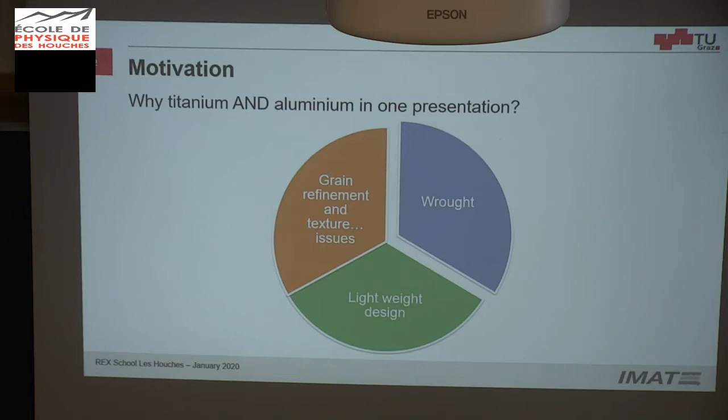And this is the topic we are going to deal with today: we have grain refinement and texture issues, which means basically they don't dynamically recrystallize in the sense of discontinuous dynamic recrystallization, and therefore we don't have fine grains with random crystallographic orientations in the final products. These issues also have some consequences in the applications as well.

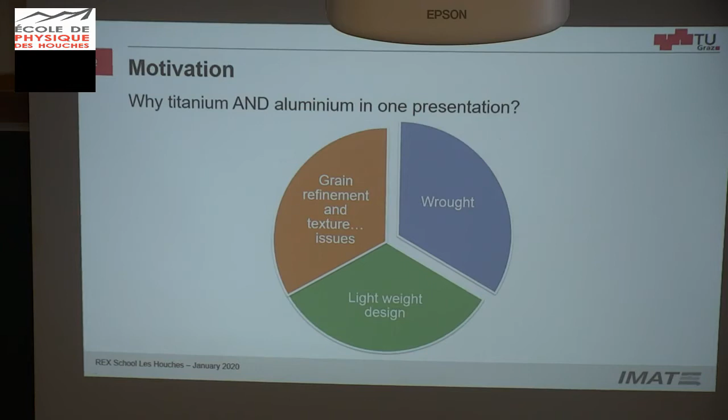So I'm going to give a very, very short introduction on titanium and aluminium alloys because the audience is very wide, and I hope I'm not going to bore you. Then a very short introduction on the meaning of high stacking fault energy materials, and then I will go to the topic, which are the experiments and modeling.

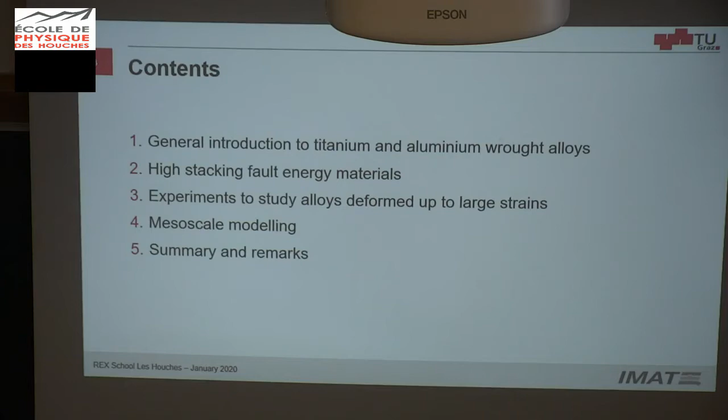So my background is experimental. I did experimental work for many years, and then I moved a bit into modeling, and now I cannot imagine any experiment without a model. And the other way around, I cannot imagine any model without experimental validation or explanations. So it's a bit of a big mix of everything I did.

So titanium alloys are used mainly for, as I said, transport lightweight design, also moderate high temperatures, but it's also used, as you have probably seen, in the Guggenheim in Bilbao. So it's covered by plates made of titanium alloys, because of the high corrosion resistance.

So the most important thing in titanium alloys is that it's very similar to steels. If you know something about steels, then titanium is easy peasy. It's even easier because we don't have any eutectoid reaction, but we have this allotropic transformation. We have HCP at low temperatures, which is not close packed, meaning it's a bit longer in one axis, so we have a crystallographic structure that is not that bad for deformation.

It also has some other slip systems that activate. And by increasing the temperature, we transform into BCC. By adding some alloying elements, we can stabilize the high temperature phase, and we can decrease the transformation temperature of this beta transus. Most titanium alloys have this type of configuration, with temperature and beta stabilizing elements. You also have alpha stabilizing elements like aluminium, which would move the whole diagram upwards. Then you have a mixture, a dual microstructure of alpha and beta.

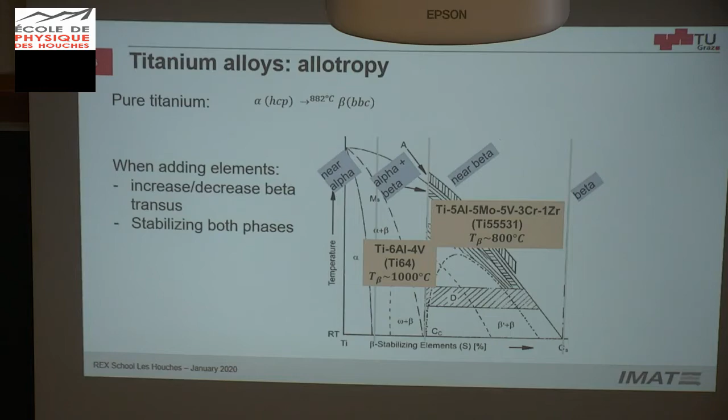So a very complex situation for deformation. These materials are processed either in beta or in alpha-beta, and this makes everything very complex when we want to understand it, control it, and then model it.

Okay, so aluminium alloys, most of you know it, it's almost everywhere. So that's why I put it here. Very day-to-day examples. And this is one of my favorite products, to be honest. Not the fish, but the aluminium foil, because it requires a lot of steps, of rolling steps.

So warm rolling, hot rolling, warm rolling, and then at the end you cannot heat it up again, take it from the furnace and roll again, because the heat transfer is very fast. Then you end up with cold rolling, and in between a lot of steps for recrystallization and also for precipitation. So it has a lot of complexities. During these steps, you may have dynamic recovery during the deformation. If you do extrusion, you may have very large strains, and in the interpasses you have static recrystallization. So you end up with a microstructure which is very weird.

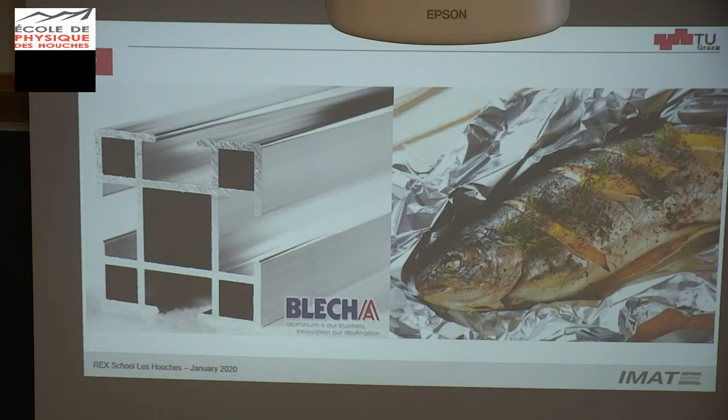And of course, I'm showing here profiles that I think everybody knows. All of them are made of aluminium here, I think. Oh yeah, okay good, this is also very clever. Good, so this is very general, so at least you know what I'm going to speak about.

What they have in common is that they are high stacking fault energy materials. What does this mean? If we have a perfect dislocation, this perfect dislocation can dissociate into two partial dislocations. And this configuration does not allow dislocations to move.

So it's very difficult for a dislocation to go through stacking faults. And secondly, you lose the dislocations that move into two partial dislocations that are not moving anymore. The larger this distance is, the more stable the stacking fault is, and the lower the energy you have for forming stacking faults.

So it's a simplified interpretation of stacking faults and stacking fault energies. Basically, if the stacking fault energy is very high, meaning this distance is very small, the partial dislocations can reconfigure into a perfect dislocation, and dislocations can move as before without problems. Moving of dislocations is what you need for annihilation of dislocations, and having mobile dislocations is what you need for dynamic recovery.

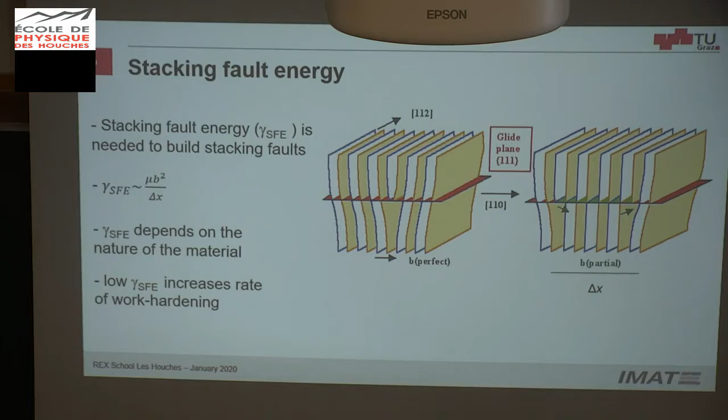And the same happens with titanium alloys. Most of them, if you don't add a lot of alloying elements, behave this way. I don't know what happens with high entropy alloys—maybe you will know something in the future. But most materials are high stacking fault energy materials, which means they will go in this direction.

So this is when we start the deformation: with cold deformation, the density of dislocations increases—this is not what I'm covering in this talk. With warm deformation, at the beginning the density of dislocations increases up to a small strain. Then we may have either dynamic recrystallization or discontinuous dynamic recrystallization, like in nickel-based alloys, and dynamic recovery in our case.

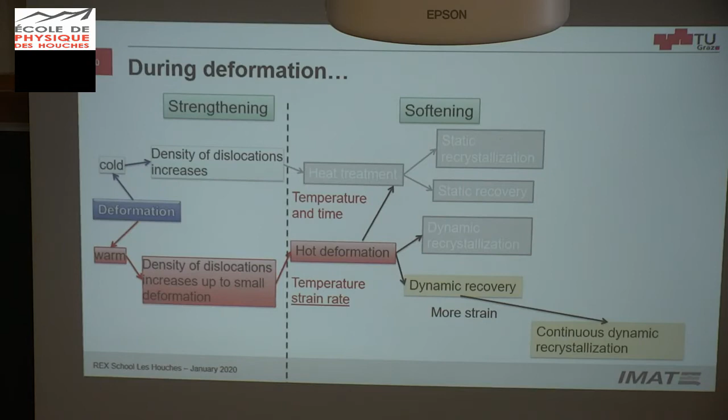And if we go further with the strain, then we will have what is called continuous dynamic recrystallization, or extended recovery, or many of the names you can find in the literature. Basically, we are speaking about materials that during cold deformation form cells, so they don't form stacking faults, they don't form twins.

These cells look like this: we have dislocations at the cell walls and spare dislocations within the cells. During high temperature deformation, the cell walls get sharpened, and then you have subgrain formation instead of cells.

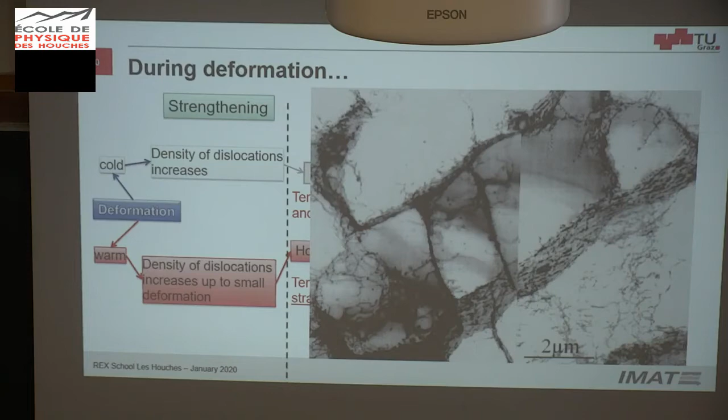Good, oops, sorry, come back. Oh, okay, sorry, this isn't supposed to be like this.

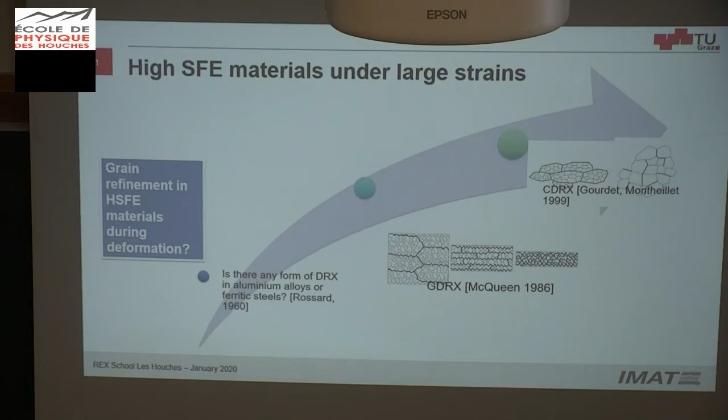So the question of how to refine the grain in high stacking fault energy materials is not new. It was done, I have to calculate, about 60 years ago, the first time at least in the literature, by Rossard. He was asking: is there any form of dynamic recrystallization in aluminum alloys or ferritic steels? By the way, ferritic steels are also high stacking fault energy materials, so you can imagine the same as what I'm saying now, but for steels.

Why am I not showing steels here? Because I basically don't work on steels, but you can imagine the same applies for ferritic steels.

In 1986, McQueen came with the idea that there is some type of recrystallization when these high-angle grain boundaries get flattened by the compression, for instance, and get pinched off by the formation of subgrains. With this, you have what is called geometric dynamic recrystallization, which means you need huge deformation to get very thin, plate-like grains, through formation of subgrains due to dynamic recovery, and then pinching off of the high-angle grain boundaries under deformation.

Later on, Montheillet and Gourdet were working on what is now called continuous dynamic recrystallization. This was, I'm pretty sure you already know, a kind of scientific fight between these two different theories. We think it's not either this alone or that alone, but most of the time a combination of them.

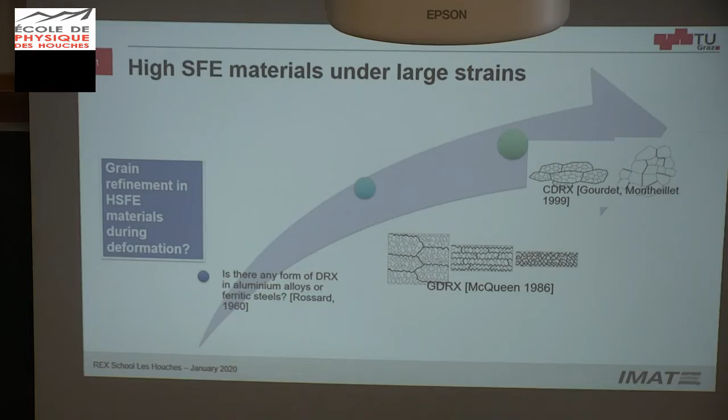The group of McQueen also split, and they went on with geometric dynamic recrystallization, calling it extended dynamic recovery—the name is more or less the same. Here the idea is that subgrains are formed and allowed to rotate. The dislocation increment goes into the low angle grain boundaries, so the misorientation between subgrains increases until you have the formation of high angle grain boundaries. So it's a very simplified interpretation of both.

When we want to study deformation at large strains, we think about experiments and models. The models are, in my opinion, not meant to replace experiments. I think yesterday in the Digimu workshop the same idea was given—it's not to replace experiments. We think of models as a way of explaining the phenomena, as well as to reduce the amount of experiments or direct experiments in one direction, but not to completely get rid of experiments. We need experiments to explain and validate, so both of them. Otherwise, we don't know what we are modeling.

And this was one of the largest problems with respect to continuous dynamic recrystallization and titanium alloys. I'm going to show this afterwards.

So in the experiments, for deformation at large strains, we want to get the flow curves—stress strain—and the samples for further investigation.

So this, you're laughing, but this is not always understood. What did you do with the samples? I threw them away, I don't know the name. I changed them, I mixed them.

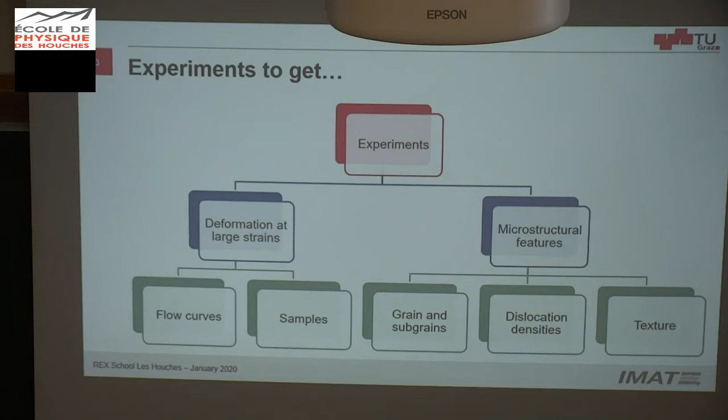Which experiments? For deformation at large strains, you don't have many experiments. You have hot torsion—this is a typical experiment, not a new one. You may have something in industry, similar to hot extrusion. There are also ways of getting large strains in small steps: you get a strain, then static phenomena, then strain again, then static phenomena again. So you have a cumulative large strain, but not continuously.

For microstructural features, you may use direct methods—you open the material and take a look at it. This is microscopy, any type of microscopy, mainly for dynamic recovery. We use a lot of EBSD.

Then you have other, indirect methods, which are not much used. I know Andras is working a lot on XRD, but you may also use differential scanning calorimetry to account for stored energy, for example, or hardness. It's a very simple method, hardness, but it gives a lot of information about stored energy.

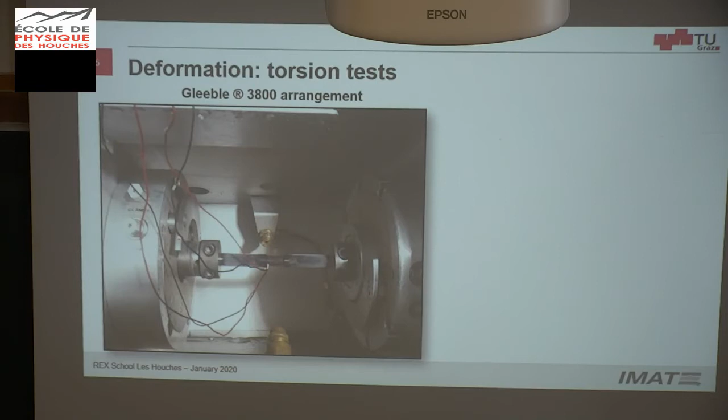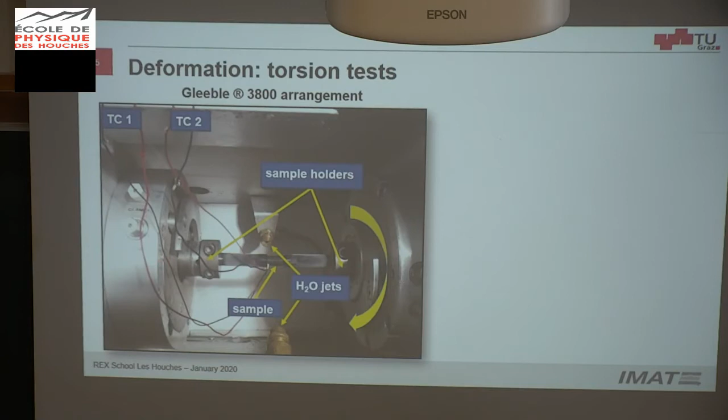This is the sample, and these are the sample holders. One head rotates infinitely until the material breaks. You can heat up the sample by alternating current, using the ohmic resistance of the material.

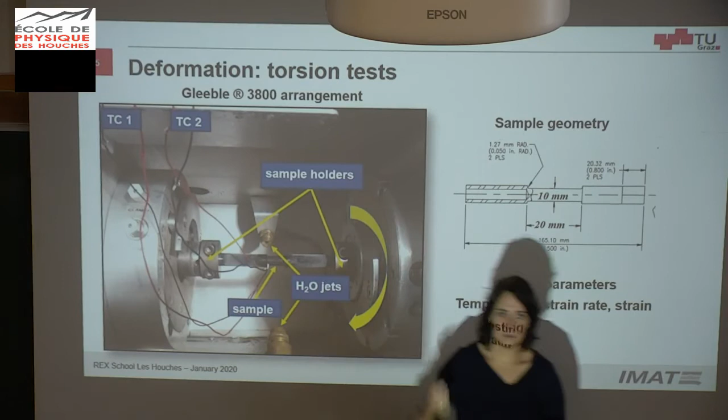Of course, if you put the thermocouple here in the middle of the sample and start rotating, you strangulate the sample, so that's not the best way. So you put the thermocouple on the shoulder. The shoulder looks like this.

The sample looks like this. It's hollowed at the heads, and with this you get more or less the same cross-sectional area here as here, and therefore the same resistance and more or less the same temperature.

What we usually do is put thermocouples here, perform heat treatments, and calibrate until we know which temperature to control or set here to get what we want here. The most important thing is to decrease the temperature gradient, because a large gradient produces flow localization, which is not desired.

Yeah, you have a technical question. Your sample has this total length, or is it only 20? The total length is here. All of this is the same.

And you drill a hole to slide the thermocouple in? No, the thermocouple is spot welded here on the shoulder of the sample. No, it's only this part. If the sample is good, only this part is deforming, and this is not deforming.

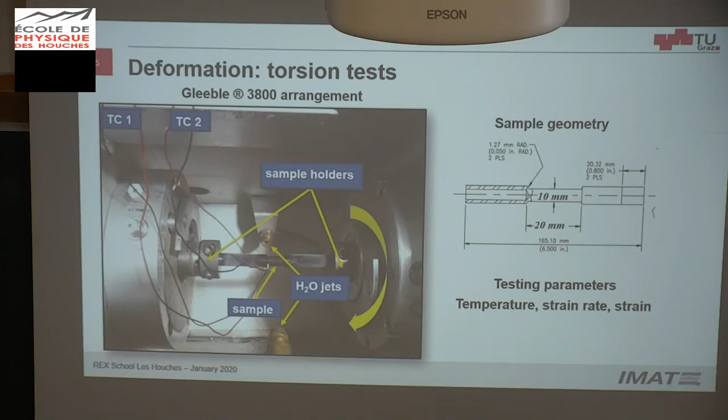In our case, we had to also modify this a bit, because we saw it was cooling down only from one side and not from the other. If you have further questions on the Gleeble, I will be happy to answer them.

So the first trials on aluminium alloys showed something like this. This is light optical microscopy along the gauge, and this is EBSD. What you see is that the microstructure is very heterogeneous.

So we didn't cut as usual. People typically cut at a given percentage and only observe the microstructure to represent global strain and stress values. What we wanted to do was see the evolution of these boundaries. Here in blue you see low angle grain boundaries, and in black, high angle grain boundaries.

You can see that by increasing the strain - the strain in the middle should be zero. In this case it's not, because the sample was not really aligned, but it must be zero. Then we increase the strain in this direction. But due to the texture of the material, combined with some misalignment, we got this very strange pattern.

We can also see the evolution of the dynamic recovery, continuously transforming into high angle grain boundaries. What you can see is that everything is green, which means we have a very large texture - we produced a textured material.

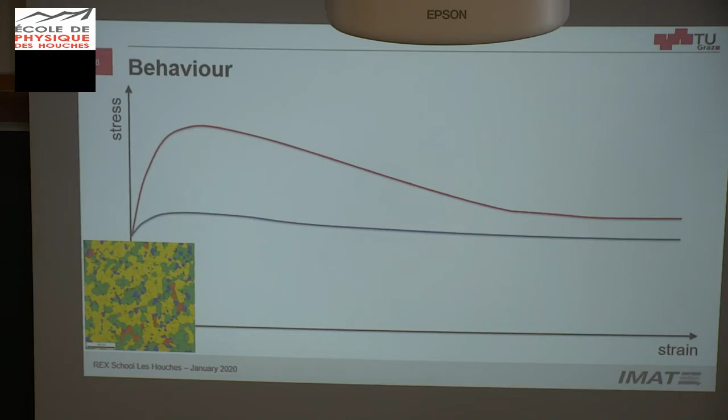So then we decided to go to another material - here it's extruded material, so you will see some of the pictures taken in this direction and some in the other direction of the grains. And we have the formation...

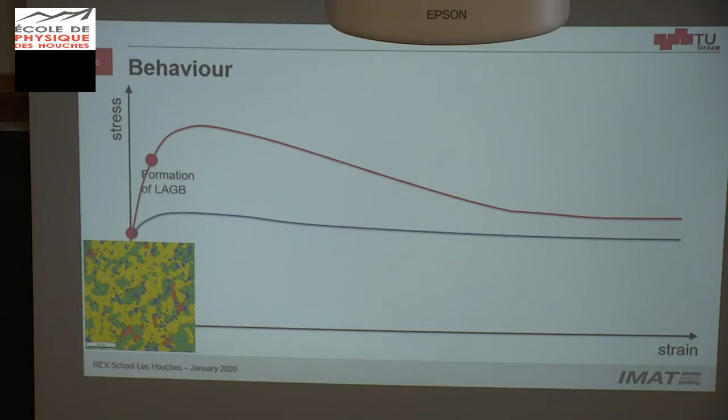This is a sketch of low angle grain boundaries at low temperatures. Then at one point we have the formation of high angle grain boundaries, and we assume that when we have a steady state at very large strains - now speaking above 5 or 10 of strain, depending on temperature and strain rate - we have 100% recrystallization, which is reached.

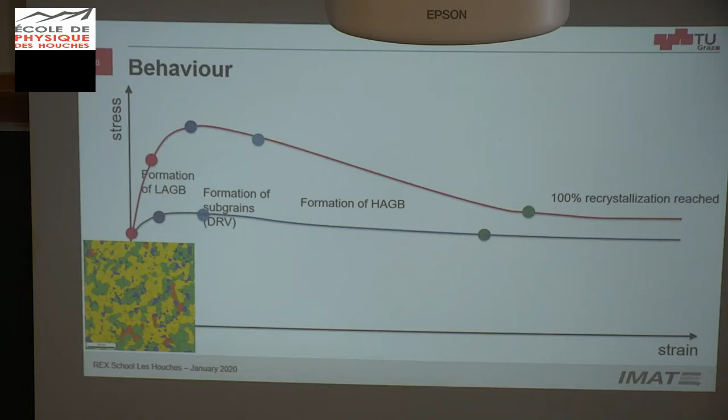This is how it looks if I go to 350 degrees or higher temperatures. This is GOS, the grain orientation spread map. Blue means low misorientation within the grains, and orange means high misorientation within the grains.

It goes through very large transformations until it really starts to dynamically recrystallize continuously.

Since it's not easy to quantify the dynamic recrystallization rate directly, what we use instead is the fraction of high-angle grain boundaries - another way of counting the percentage or grade of recrystallization.

Imagine you only have high-angle grain boundaries - then you have 100% fraction of high-angle grain boundaries, meaning 100% recrystallization. In this case, you can compare: the fraction is 67% compared to 14% recrystallization grade. So it's a way of counting this - there's no other way we have in this case.

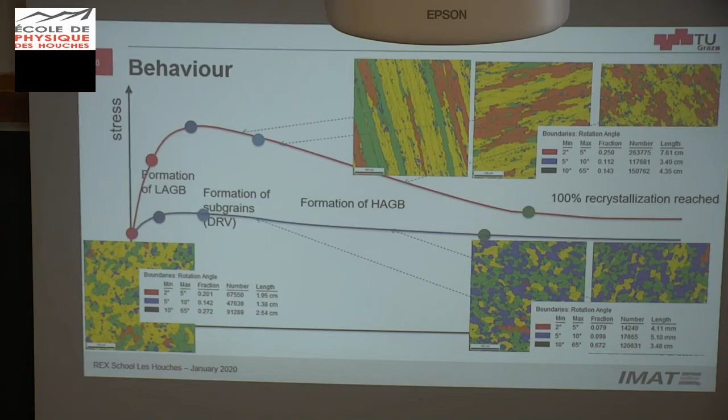We also were trying to quantify geometric necessary dislocations. This is what you get from the KAM maps. And this is the evolution for the as-received samples, or as-received condition. And of course, the as-received condition is also a mixture of dynamic recovered and static recrystallized structure.

By deforming at low temperatures, we increment the stored energy. So here is the geometric necessary dislocations density. In this direction, you go to higher values of dislocation densities, or stored energy, whatever how you want to see it.

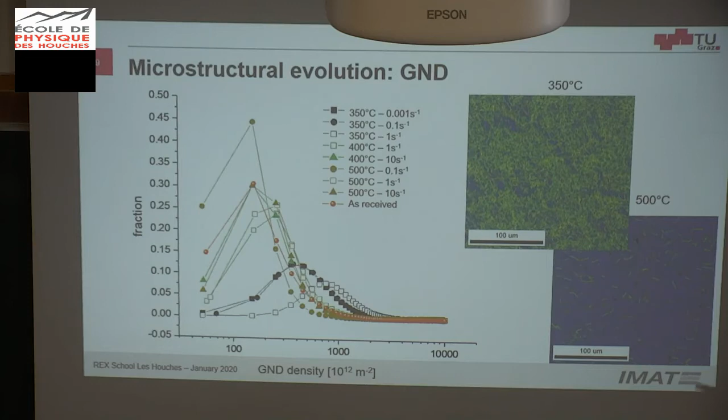In this direction, we are increasing - so this is also lower strain rate, higher strain rate. So we increase the stored energy. And when we go to higher temperatures, we also get into the other direction. This is very typical. You will see this not only for large strains, also for low strains. You will see that you increase the recovery at higher temperatures if you go in this direction, and you increase the stored energy in the other direction.

So we tried to do, and did successfully, in situ torsion tests. It took us a while because it was difficult to get the proposal approved. Nobody believed that we could do this, and it took us very long until we could do this experiment. So what is the idea of this? We do torsion tests, and with this we get an incident beam that we kept as flat as possible, so we have only one part of the sample very close to the surface. And as it rotates, of course, you don't always see the same part of the sample.

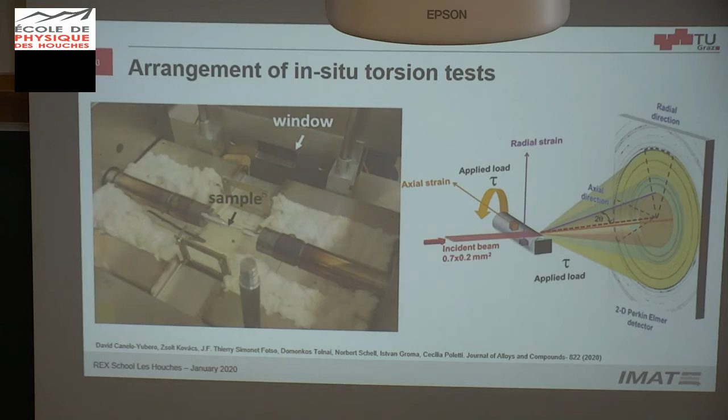At the beginning I was very disappointed because the crystallite size is not the subgrain size, it's not the grain size, it's an entity. And this entity is much smaller than the subgrain size - it's only a coherent domain. It's very difficult to interpret and to correlate with respect to the EBSD data.

So how do we interpret this? Even if it's made with hands - we have the static microstructure that consists of low angle grain boundaries, high angle grain boundaries, dislocations, and the coherent domain is the crystallite, which has a size defined by the previous processing. When we start deforming, dislocation density starts to increase, so interior dislocations within the cells, the crystallite size starts to decrease, and this is what we see here, this drop, and we also see the increment in the dislocation density. This is for a very small effective strain.

If you see here, we deform up to almost 3. But then when recovery starts, these dislocations are arranged into low angle grain boundaries, and interior dislocations start to annihilate, then the crystallite size increases again, and the dislocation density decreases.

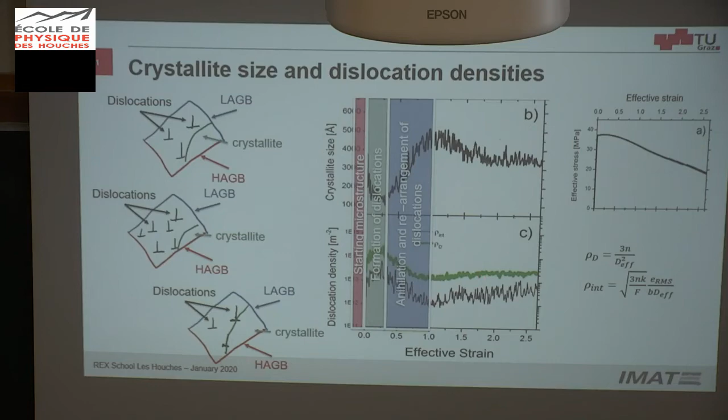So there's also a question: we know that we form the subgrains from the dislocations that are being accumulated at the subgrain structure, or the increment of the amount of dislocations at the subgrain walls. Is there any geometric dynamic recrystallization component? We don't have to exclude this, because the high angle grain boundaries here also move.

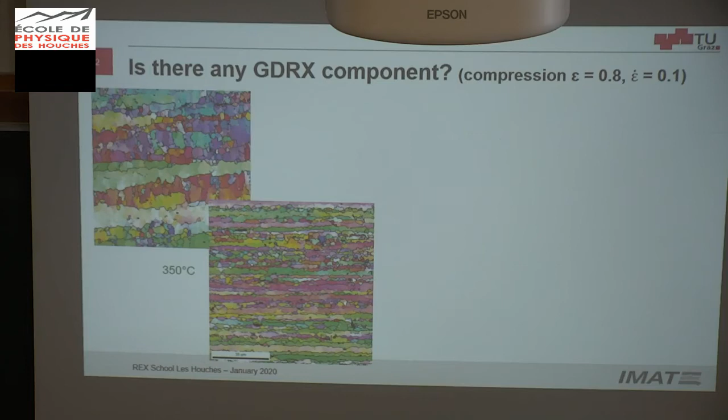So what we did is we took this material and compressed it in both directions - in this direction and in this direction - to see if there is a difference. And as expected, indeed there is a difference. If we compress in this direction, we have this microstructure. If we compress in the other direction, we may have some pinching of the high angle grain boundaries. As you can see here, we have much more new grains formed only by geometric dynamic recrystallization, and this is with only compression, so not very large strains.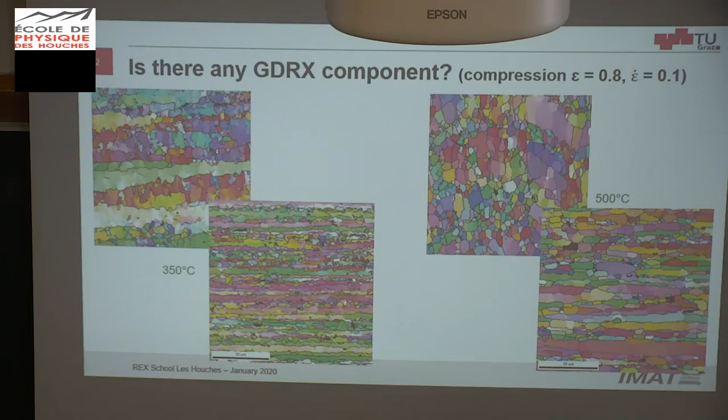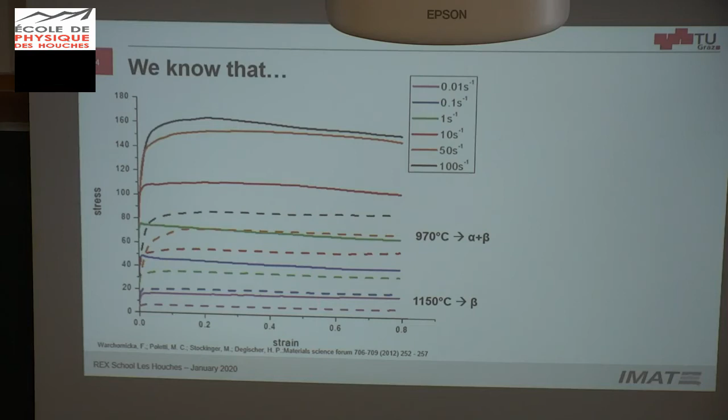Okay, let's move now to titanium alloys. In titanium alloys, we know that we have this type of flow curves, which typically represent dynamic recovery curves. For compression, these are very small strains. Also, if we increase the temperature, everything goes down, and this is sensitive to strain rates. And we know that if we do deformation, this is titanium 6-4.

So when you cool down, you have martensite. It's awful for reconstruction. So you see that there is no recrystallization. This is cooled down. There is no recrystallization, so the grain boundary is moved a bit. They are serrated with respect to strain rate, or with respect to the size of the subgrain actually. But there is no recrystallization.

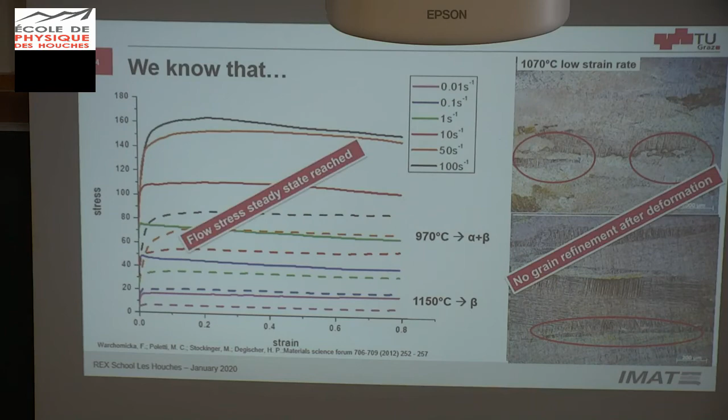We also know that from other alloys where we don't have this martensitic transformation, so we can watch what happens in EBSD in the beta phase. We have the high angle grain boundaries in black and the low angle grain boundaries in white, and we see substructure formation. If we increase the strain rate, we see also substructure formation in a very heterogeneous way. This makes the processing of this material also very complex.

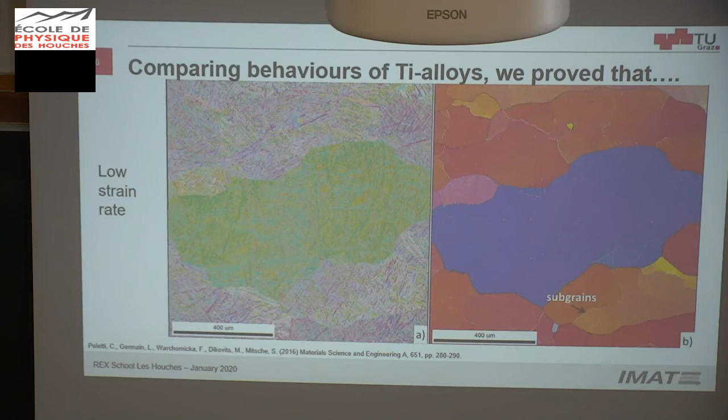And we also, if we reconstruct titanium 6-4, this martensitic structure, into the high temperature phase - so this is the martensitic transformation - we reconstruct now the beta phase. We also can see the formation of subgrains and the formation of probably new grains by geometric dynamic recrystallization or continuous dynamic recrystallization at the boundaries, and subgrains as well. So there is no discontinuous dynamic recrystallization in titanium alloys.

And there are still not a lot of publications because it's very difficult to get these kind of results where you quench immediately after the deformation. Especially when you go to very high temperatures, it's very difficult to really quench and have in situ experiments. And this is important for us afterwards for the modeling.

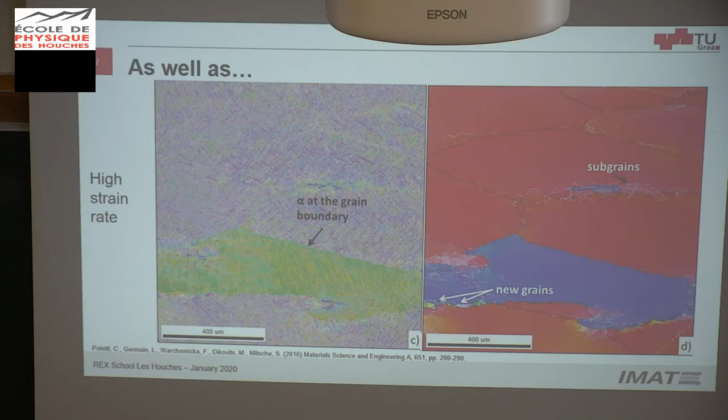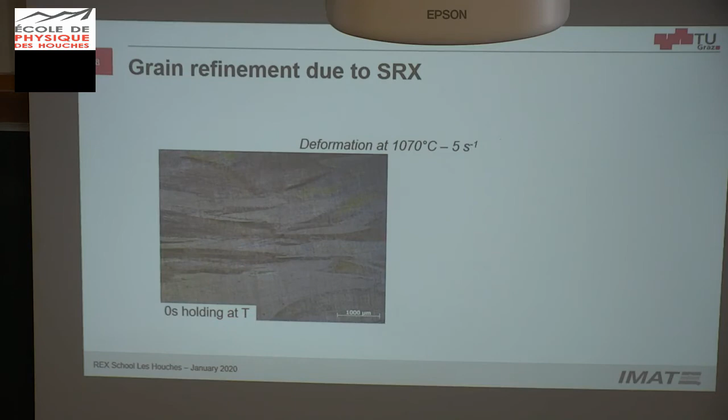We are not modeling discontinuous dynamic recrystallization with critical strain and so on. And we may have grain refinement due to static recrystallization. So if I do deformation and zero holding time at very high temperatures, I have something like this, or nothing. But if I wait only 15 seconds, I already have a huge amount of recrystallized grains - here more or less 40%. So that's why it's very difficult to get these kind of experiments and then to get into the phenomena.

So, and we may have grain refinement due to continuous dynamic recrystallization. What I'm showing here are experiments of the flow curves of compression tests, the same I showed before. Now they look a bit weird here in this scale. And the torsion tests. So in the torsion test, the first thing you see is you have also an increment in the dislocation density, but we have a huge drop in the stresses. At very large strains, we have also a plateau.

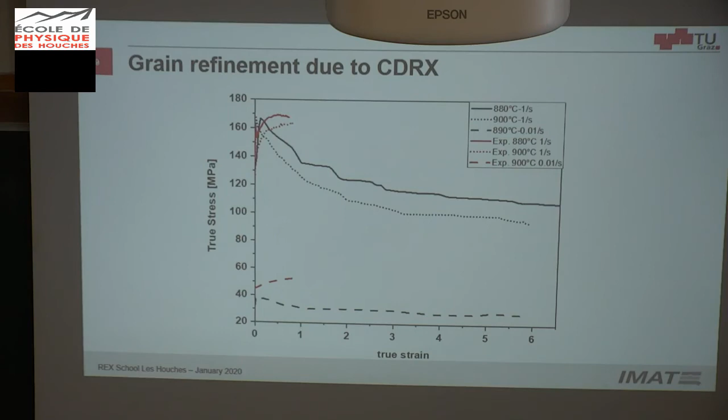At this drop, we have some explanations for it. One is the continuous dynamic recrystallization. The other explanation is we have a texture modification, which leads to a Taylor factor modification. But these two things are not enough. So probably we have something else that we still have to understand.

So here you can see the grain refinement after almost 6 of deformation at high temperatures, and this is in the two phases range. This is close to the two phases range. So sorry, the beta transus temperature is 870 in this case.

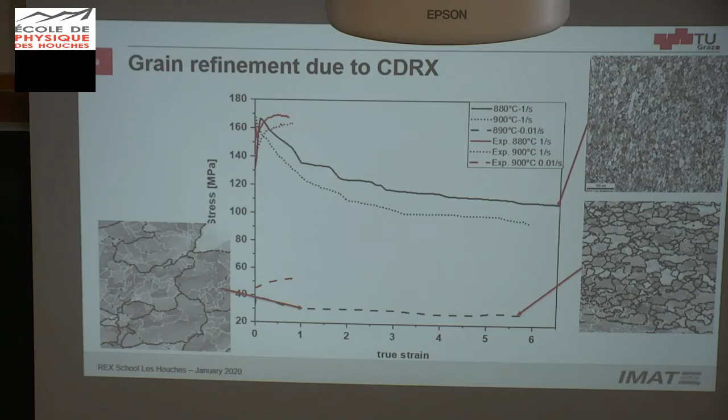Good. Now let's go shortly to the interpretation and modeling. I have only 5 minutes. Okay, so I will then skip this.

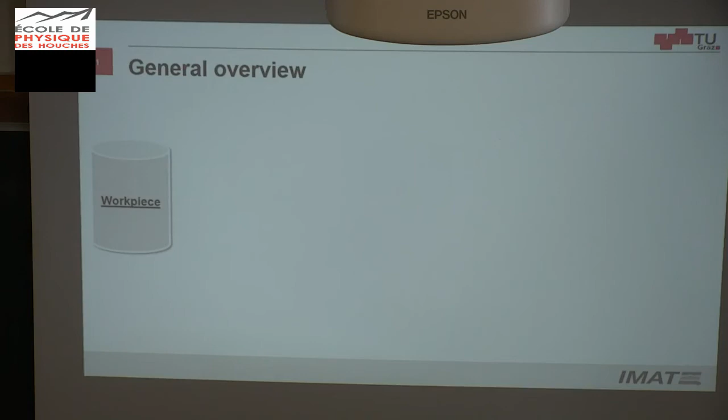Good. So I would like to start with this and what we have done, and then I will show one or two results. So this is what you usually do when you want to express the stress as a function of the dislocation density, and then you use the Kocks-Mecking equation. I think most of you know this equation. This is the hardening part, and this is the recovery part. So I'm going to tell why we are not using this.

First of all, here you have the dislocation density, which means that all dislocations produce the same strain field. This is telling us that dislocations are isolated, producing a strain field, and this has a consequence. This is not taking into account dislocations at boundaries where the strain field is smaller or forming dipoles.

The second thing is, h and r are usually fitting parameters. They can be correlated to the temperature in an Arrhenius type relation, or phenomenologically correlated to the strain rate through the strain rate sensitivity. But in any case, you need to adjust them, and there is nothing related to what is happening to dislocations or interactions of dislocations.

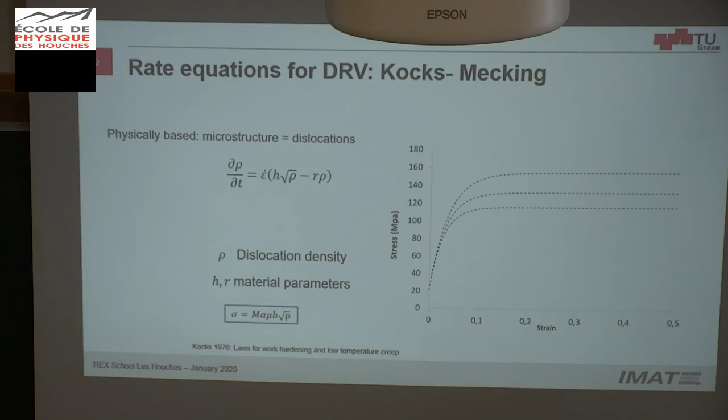So what we did is start with this. Then we saw that for cold and hot deformation, one dislocation density is not enough, so we moved into three dislocation densities: at the walls, interiors, and mobile dislocation densities. Then we also implemented what happens if the walls start increasing the misorientation.

They are very old equations that describe what happens during dynamic recovery during creep or dislocation creep. It's not any creep, not diffusion creep, but what happens with the interaction of dislocations. So there are rate equations that express if I am a mobile dislocation and these mobile dislocations get stuck somewhere, it becomes immobile. These mobile dislocations increase the dislocation density of the wall dislocations, it transforms into another. So it's a reaction type equation.

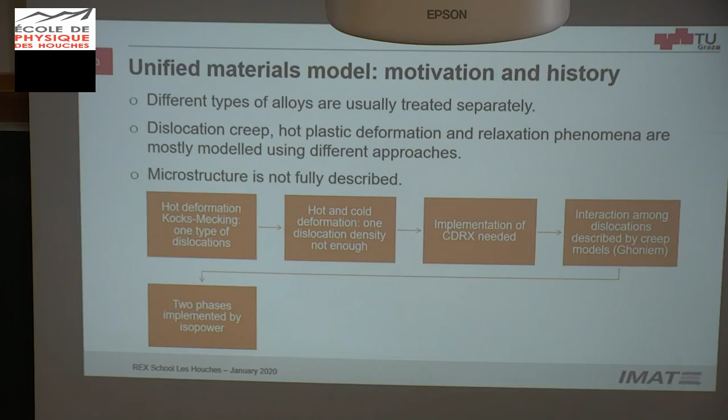So we introduced this, and of course we introduced the two phases for titanium alloys in an isopower way. What is missing are heterogeneities, texture, and geometric dynamic recrystallization. With all this, we want to use the same internal variables, which are dislocation densities, sub-grain sizes. Grain sizes are included, particles and so on. These are all the internal variables.

We want to describe hot deformation as well as creep, dislocation creep of course. We want to use one model for all these phenomena, and we want to use one model for all high stacking fault energy materials. So I'm going to show them.

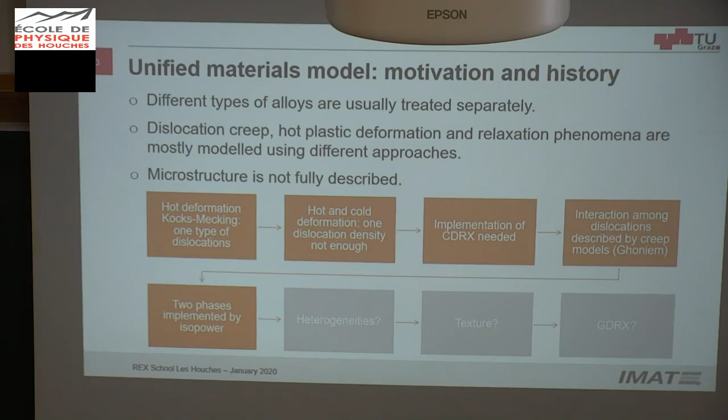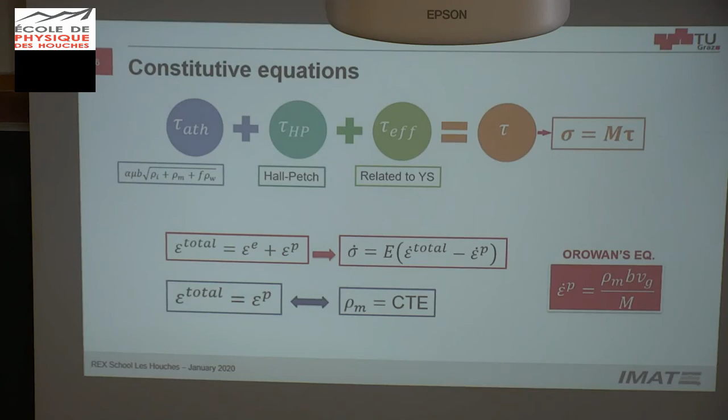This is more or less what I already said. So we have the constitutive equations. Okay, I can leave it, I think. Why am I so slow?

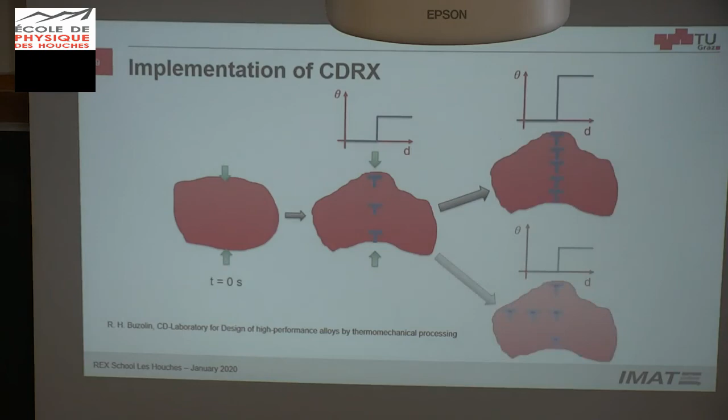I want to show you a summary of the model. For the model, we need as input the external variables, the strength parameters. We are not yet in a position of calculating yield strength. We also need the microstructure, initial microstructure, and initial material parameters, activation energies, and high angle grain boundary mobility.

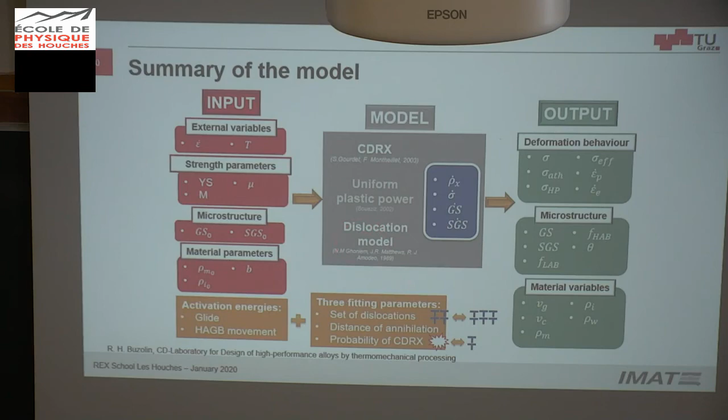The outputs are all these here. So it's not only the stress strain curves, it's also the microstructure, the recrystallization rate, the fraction of high angle grain boundaries, and we also have some glide and climb velocities as material variables. And again, we use the continuous dynamic recrystallization model as Montheillet stated, combined with the Ghoniem equations from creep and uniform plastic power.

Some results. So this is only up to small strains, so we can catch at high strains the softening of the flow.

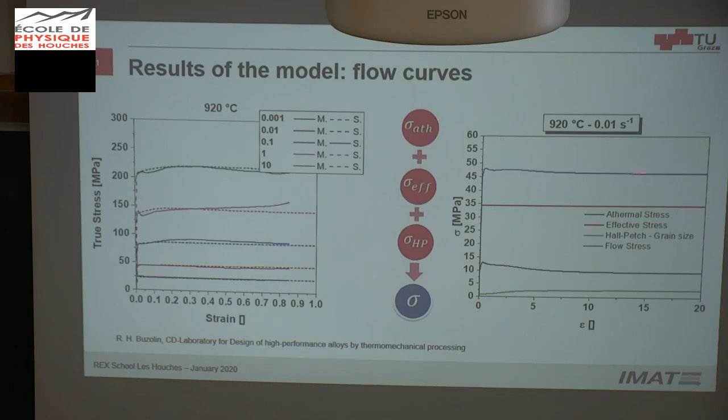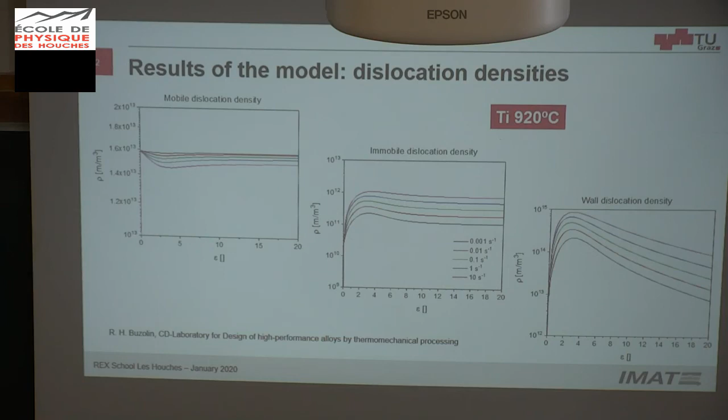And we can also catch internal variables: mobile dislocation density as a function of strain, immobile dislocation density, wall dislocation density, which are decreasing because we have continuous dynamic recrystallization. When the low angle grain boundary becomes a high angle grain boundary, then it disappears from here, let's say.

And the most interesting part is we can catch the subgrain size. So first a drop and then an increment, very similar to the measurements that we have done of the crystallite size in the in situ measurements.

We can get the grain size as well, so the refinement of the grains, you can think about extrusion processes. We get the fraction of high angle grain boundaries, which if we start with a recrystallized material, first decreases and then increases until we reach recrystallization.

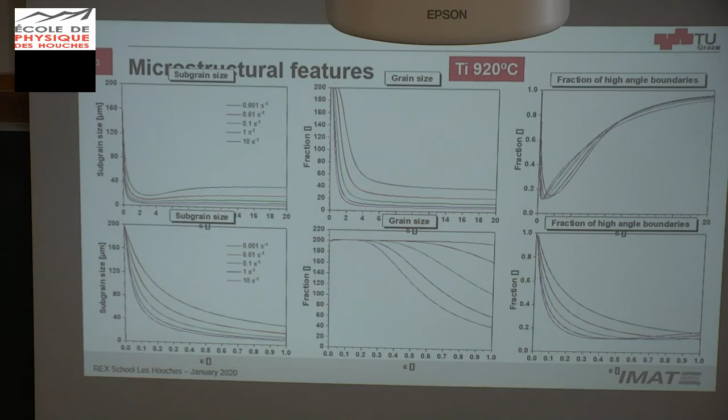And with this, this only zooms up to one of the deformation. And the same for torsion flow curves. Here we have some issues still to clarify.

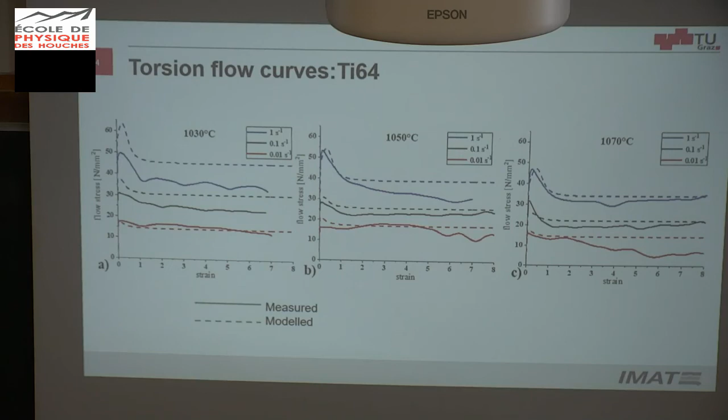Okay, I'm very sorry that I was that slow, but what I want to summarize is we are dealing with high stacking fault energy materials. They go into dynamic recovery, followed by continuous dynamic recrystallization, but also geometric dynamic recrystallization can occur. We have texture changes, we have grain refinement at very large strains, and we can model it.

And the model allows us to explain both the stress behavior as well as the microstructure behavior. So if you have any questions, I will be glad to answer them.